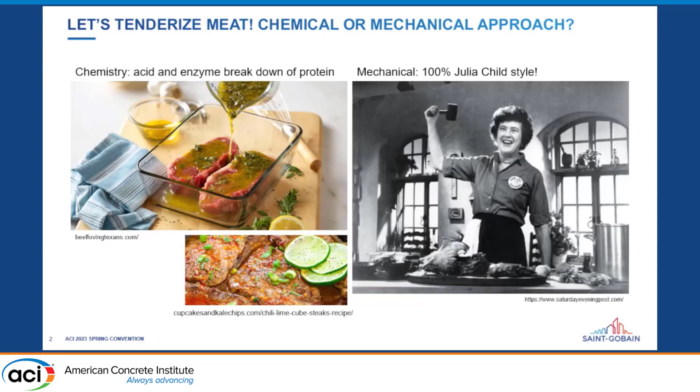So in all of these admixture talks that we've had over the years, you see the tremendous amount of engineering that goes into these chemicals, right? It has to deal with a ton of variability in your materials and everything. And so what got us thinking about this was that we were really heavy on chemistry. If you're going to marinate your steak, for example, you really do have two ways of doing it. A marinade, which is a chemical way, breaks down the proteins and all that. Don't quote me on that. And then you have the Julia Child way, right? Just smash that thing to pieces. I tried to find a recipe that had both, and I found one. In case you guys want to make it, it's over here. But that really applies to what we've done in the concrete industry as well.

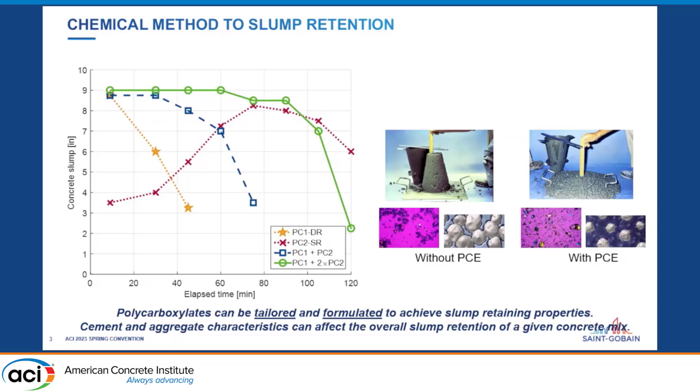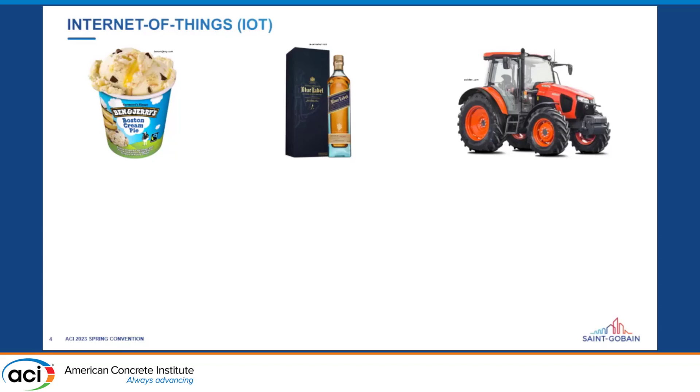All right, I'm going to jump now to the IoT, or Internet of Things. I think most of us have seen this everywhere, almost intrusively, right? We have sensors that go into refrigerators for ice cream that tell you when things need to get changed or if issues are happening. There are marketing NFC chips in whiskey bottles. You click on this and it saves your information. Be careful with all these things. It saves your information and then gets marketing information back. Probably one of the closest ones is the agricultural industry, right? Also a very dirty industry, lots of heavy equipment, but they've done a great job at sensoring these things up. They have self-driving tractors out there. It's crazy.

And the reason a lot of this has happened is because these sensors have become so cheap, right? This is one reason. Apple makes how many of these every year? Accelerometer in here, temperature sensors, so these have really come down in price. And people are not only using these to get information about their products, but they're putting it up to the cloud, and this makes the whole IoT loop. Put it up to the cloud, and you can really start to do some amazing analytics, analysis, all that kind of stuff.

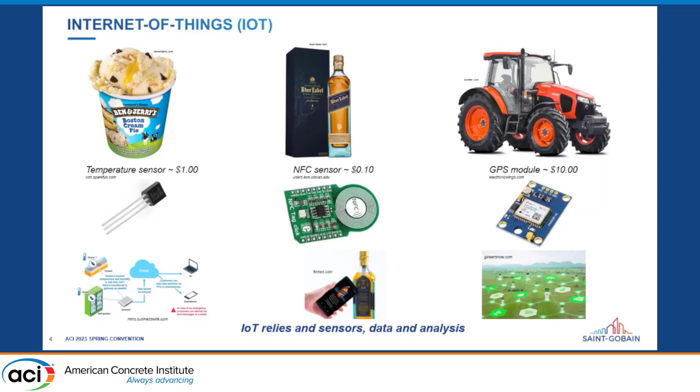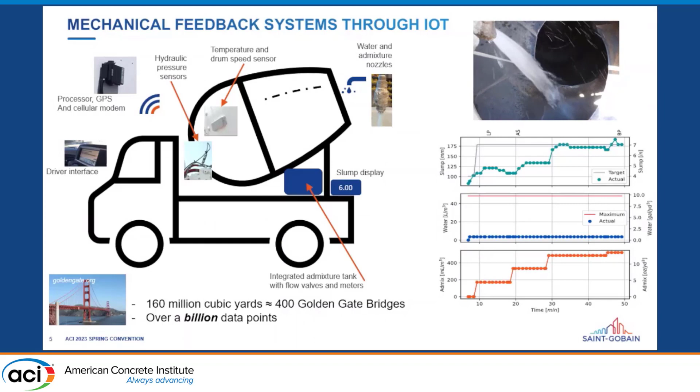Okay, so I'm just going to go quickly through the ready mix delivery cycle. Most of us are familiar with it in this room, but just for those who might not be. Basically, you have your concrete truck that's batched, and traditionally this is where you put your chemicals in. Obviously, the water goes in as well. And then also initial adjustments happen, and we'll talk about who does this. The truck goes to the job site, arrives at the job site. Sometimes it's allowed to have final adjustments, sometimes not, and then of course you need to get it out of the drum.

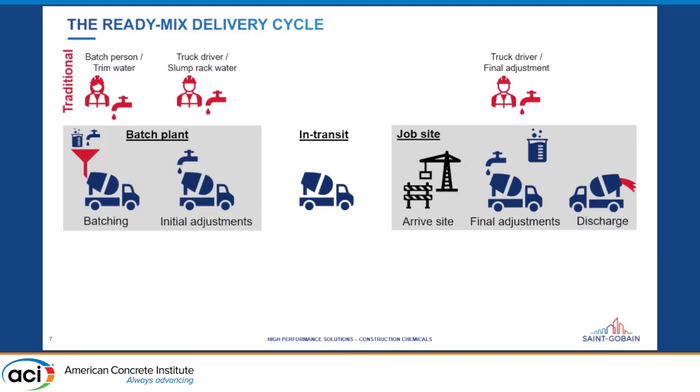So traditionally, you have a batch person that's in charge of this initial water, usually called the trim water. So based on the recipe, they can actually hold out a little bit of water. And actually you'll see a lot of people end up doing this. The truck gets batched, it goes to what's called the slump rack, and then the driver, in a lot of cases, also has the ability to make adjustments that they need to do. And they usually do this while they're cleaning the truck. It gets to the job site, and then again, like we talked about, final adjustments.

So the system with the sensors on it, the first stable slump it gets after batching is called the initial slump. So everything's mixed in there, and this gives a good indication, by the way, of your batching processes and all that kind of stuff.

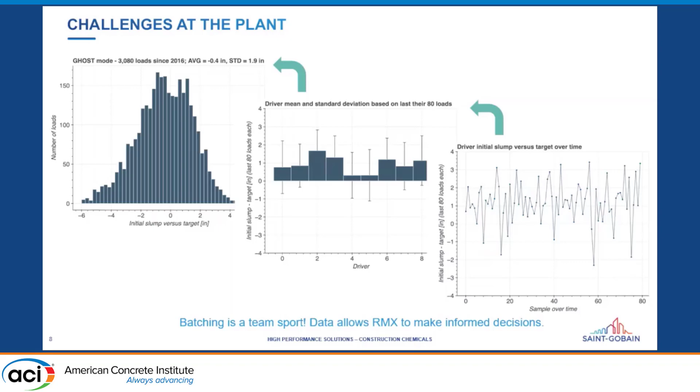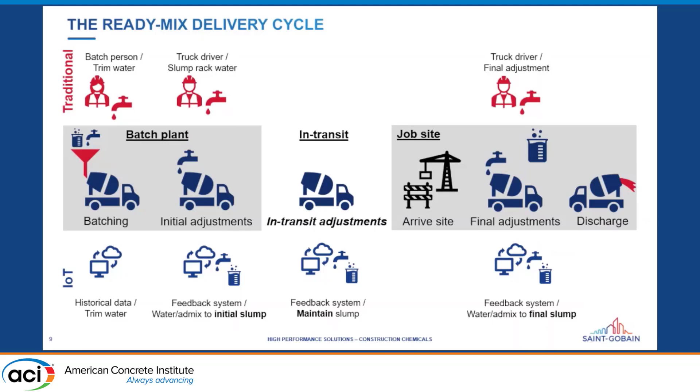All right, so what I'm going to do now is just make a very broad comparison. So I lumped a bunch of customers' data together. This isn't one customer or anything. Lumped them all together just to show you generally what we see across the industry and some interesting things that come out of it. And a lot of it is just highlighting challenges that we have as ready-mix producers. And it's fantastic that we've gotten to this point over the 80, 90 years creating all these buildings with this variability.

All right, so here we have 1 million loads. This is broken up into slumps at different points in the delivery. So we have when the truck first arrives at the job site, and then we also have at discharge. So we all know that at the site sometimes water, other fluids are added, so there's a change in that slump. All right, and so this again is slump versus target.

So on average, you can see that as an industry, we do pretty well, right? Average is 0.5 different from your target. Half an inch, right? You're not going to get any better than that. At discharge, it's starting to creep up a little bit, right? An inch above. But you can see the standard deviations are just very large for this kind of system.

On the right here, we have the trim. So this is basically your trim water, and then the water adjustments that are made on the site, all right? You can see kind of these humps here. Those basically, if you notice, are at integers, right? Nobody's trimming 2.37 gallons of water. It's 2, 3, 4 kind of thing.

But one thing you can notice, at least from this group of producers, is that the average amount of trim is around 2.5 gallons, right? They're holding back water. Yet, you see on the left side, you're still able to make your slump. Right? So there's a lot of things that go into it, and I'm not going to talk about them today, but we just talked about the driver at the slump rack.

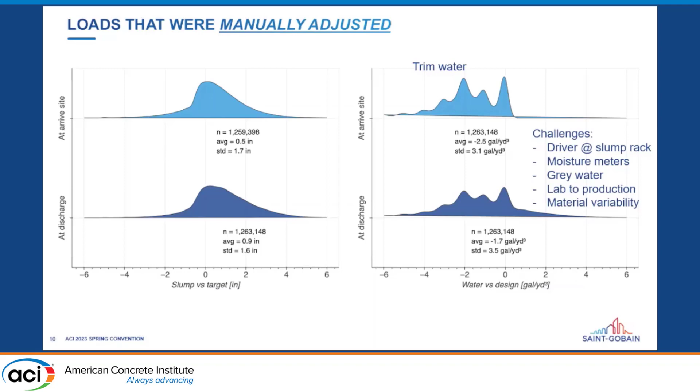Just to give an example of the material variability, and I didn't put this amount of data points in there, I think this was several hundreds of thousands of data points. What we can do is calculate the slump loss over time, the slump loss rate, and then I'm plotting the slump loss rate versus just how long the concrete has been around. And so you can see that there's a lot of variability in this as well. So the slump loss is mostly due to your material variability, while your age of concrete at discharge is traffic, job site delays, and all that.

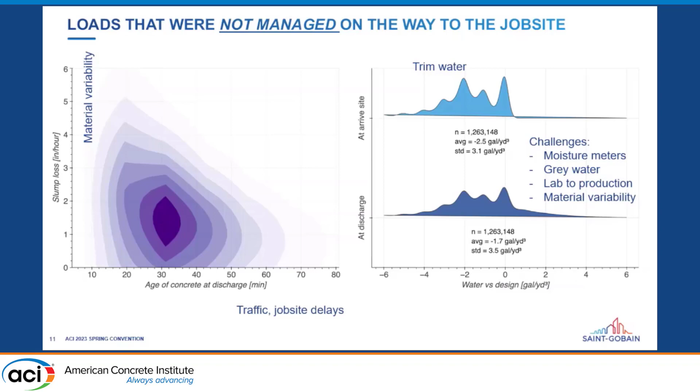So having to deal with this, right? This is why there is a variability in water. This is why there is variability in your slump at discharge. But once you kind of identify this, there are things that you can do to help.

All right, so we talked about earlier on having this ADMIX-MANAGED comparison, right? So we're able to add the ADMIX in response automatically to the concrete slump. So when it drops essentially ½ inch below target, ADMIX is added and automatically gets to the right slump. And so you can see that cleans up the variability tremendously, right? Cuts it in half. Standard deviation's pretty hard to reduce. Cutting it in half is really good. But that should make pretty good sense. You have a sensor on there, closed loop feedback. You're able to do that.

The other thing that we wanted to look at was just this concept of how long your load is within target. All right. So typically without a sensor, you'll batch a little bit high, and then you'll let the slump fall, and hopefully it gets to the right target when you get to the job site. So your slump is in target at the very end. Or if you're unlucky, it kind of goes and drops down below. The other part here is, if I calculate, for example, this load right here, it's about 50% within target.

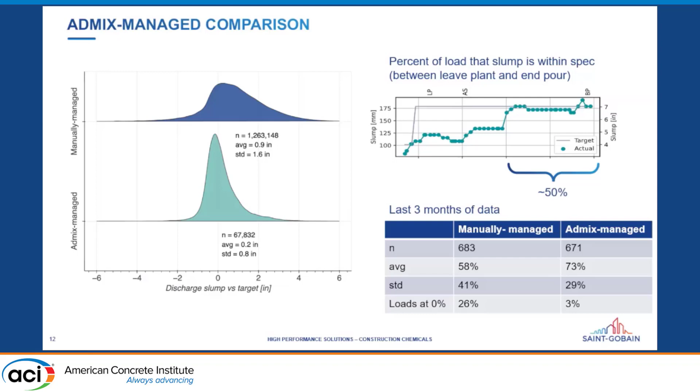Sorry, Terry, how long do I have? Oh, I should slow down then. We'll take more questions. That's what we'll do.

All right. I think one question that I'm just going to answer right away is, when you add the admixture over time instead of all up front, how does that compare? Right? Depending on the system, a lot of times we'll tell customers delay your admix, right? Especially your polycarboxylates. You'll get more efficiency after that. And what it turns out is that the longer you can delay that, the more efficiency you get to keep the same amount of slump.

And so we did a quick study with one of our accounts. They're actually here today, where they did a comparison of 2 different delivery methods for the same project, same mix design, same time frame. And so what they said was, okay, we'll do things normal, however we did it before, and then we'll use the ADMIX to manage the system.

All right. So what they did instead, when we talked about the trim before, they said put all the water in and then just use the admixture whenever you need it. And also they pulled out the admix from the plant. So no admix in the plant, everything's on the truck, and then they'll manage that way. So that's what we call in transit, right, this blue. And then when the admix was added at the plant, it's this red. And with the admix added at the plant, you change your slump the normal ways that you would typically do.

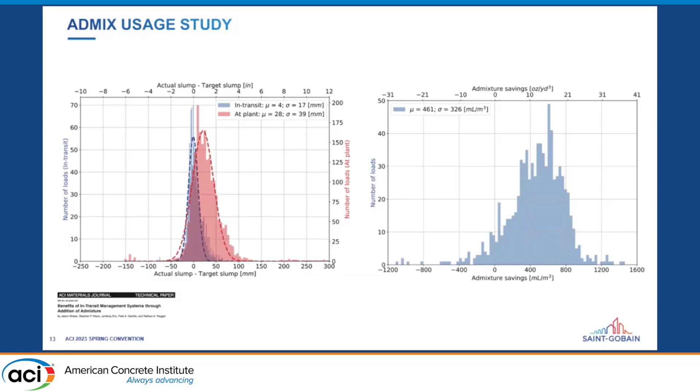All right, so just to sum up, putting this chemistry and IoT, it's not one or the other, right? It's really a combination of both. It's using both of them as you can. And I think we need that as an industry because of all the challenges that we have. We just touched on a few of them here, but the industry in general has been doing a great job because of the knowledge that people have and the knowledge that people are sharing.

Admixtures, of course, and the multitude of SCMs, right? All these things add to this, providing opportunities for these kind of systems. So having some visibility on the truck can really help. If you guys look around in a lot of the other committees that are going on at ACI, people are looking at embedded sensors, they're looking at other truck-mounted systems. A lot of this is coming out, and it's really nice to see that in a practical sense, a lot of it is improving the ways people are making their concrete.

The other thing too, just touching on this, we talked a lot about the producer, but the contractor is also benefiting from this. Having a truck arrive on site with the right slump in a consistent fashion really helps them out so that they can plan a lot better. There's some other benefits as well.

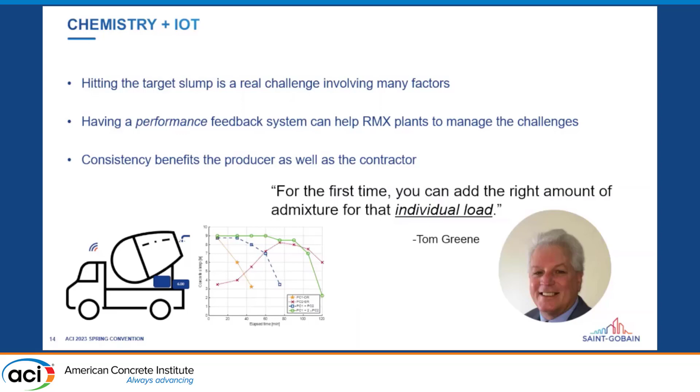But he's said this a lot of times. So for the first time, you can really add the right amount of admixture for a particular load. Not for a mix design, not for a job. It's really about that individual load.